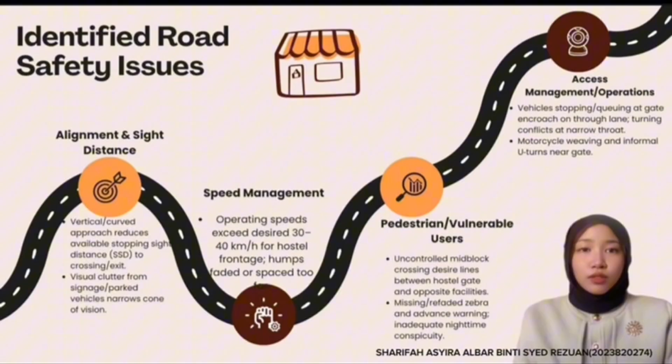Lastly, access management and operation are another concern. Vehicles stopping or queuing at the hostel gate often block the through lane, creating turning conflicts and traffic delays. We also observed motorcycles weaving through traffic and making informal U-turns near the entrance, which increases the potential for accidents.

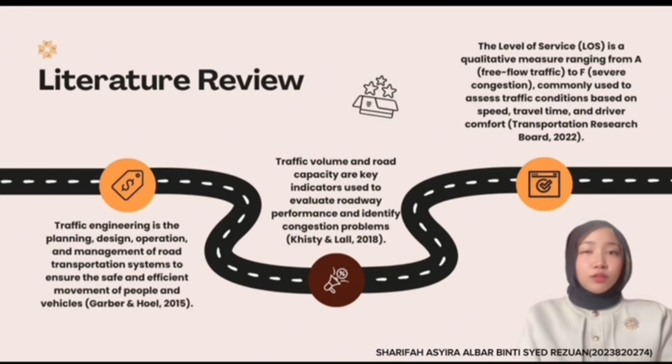For this slide, I will present the literature review for our traffic engineering project. Traffic engineering is the branch of civil engineering that focuses on the planning, design, operations, and management of road transportation systems. Its main objective is to ensure the safe and efficient movement of vehicles, pedestrians, and goods.

Another important concept is the level of service, or LOS, which classifies traffic conditions from level A, representing free flow traffic, to level F, representing heavily congested traffic. This classification helps engineers assess road performance and determine whether improvements are needed.

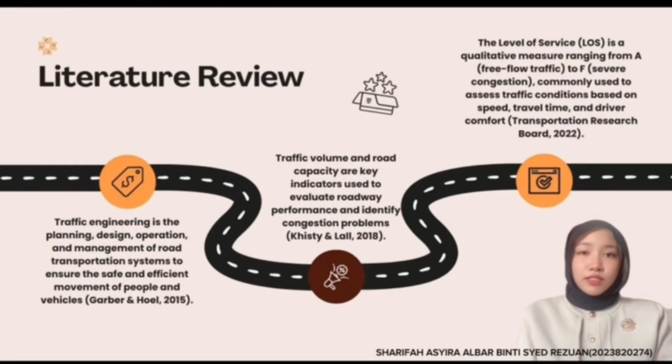Next, I will explain the technical standards that were used to assess the road conditions at our study locations. The evaluation was carried out based on the Arahan Teknik Jalan issued by the Public Works Department or JKR Malaysia, together with the Highway Capacity Manual and relevant road safety guidelines.

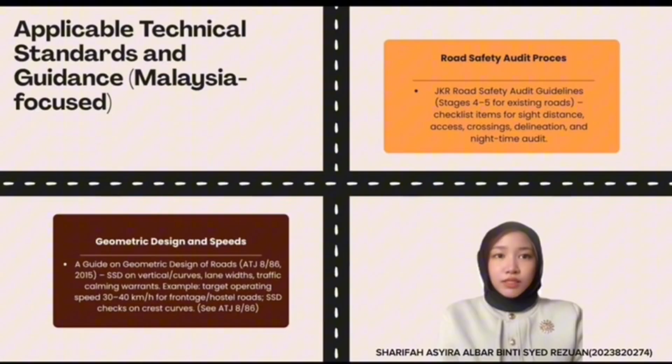For alignment and sight distance, the available stopping sight distance was compared with the minimum requirements supplied by JKR. The curved road alignment and visual obstructions reduce driver visibility, which may not satisfy the required stopping distance for safe operation.

Next, we selected a suitable study location. The chosen site was a straight and level road section located in front of Kolej Melati. This type of road minimizes the influence of slope and curve on vehicle speed, allowing us to obtain more reliable and representative traffic data.

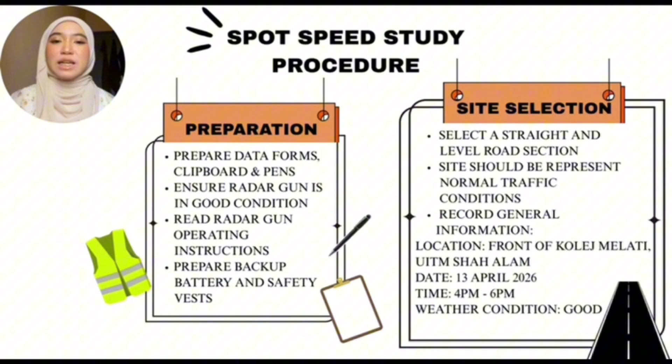Finally, we recorded the general information of the study, including the location, the date which was 13 April 2026, the observation time from 4 p.m. to 6 p.m., and the weather conditions which were good throughout the data collection period. This preparation step ensured that the spot speed study was conducted clearly, systematically, and accurately.

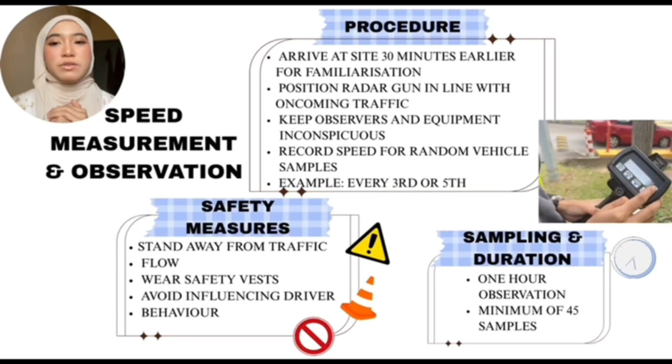Next, our team arrived at the study site about 30 minutes earlier to familiarize ourselves with the area and set up the radar gun. The radar gun was positioned facing the oncoming traffic to ensure the accuracy of the speed readings. We also remained as inconspicuous as possible so that drivers would not change their driving behavior when they noticed our presence.

For vehicle sampling, we used a random selection method by recording the speed of every third or fifth vehicle. This approach helps us to obtain representative traffic data. Although the standard procedure recommends collecting data for 1 hour or until at least 45 vehicle observations are obtained, our study successfully recorded 47 vehicle samples during the observation period.

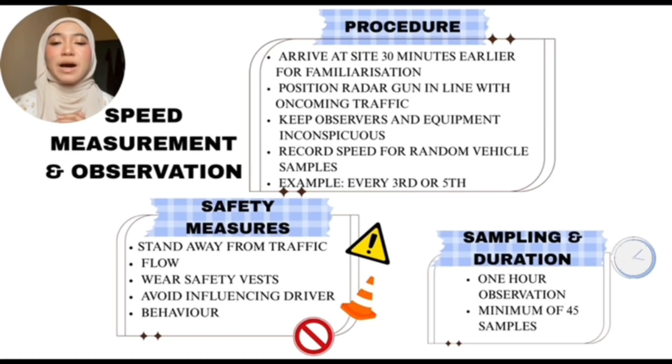Throughout the data collection process, safety was our top priority. We maintained a safe distance from moving traffic, wore safety vests to remain visible, and avoided any action that might distract drivers or interfere with normal traffic flow.

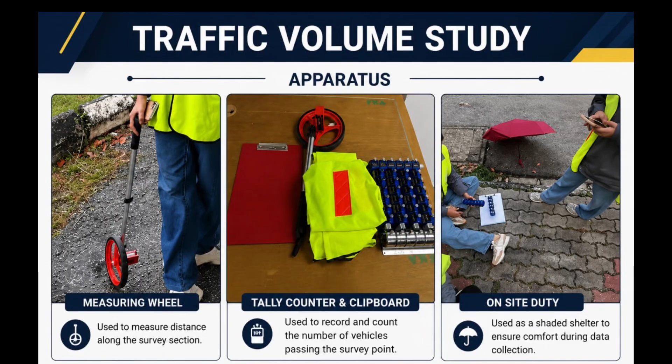For this traffic volume study, a road with a two-way T-junction was selected as the study area. Traffic observations were carried out continuously for 1 hour. The number of vehicles was recorded at 15 minutes interval, which were at 15, 30, 45 and 60 minutes.

After the observation period ended, all the collected data from the 6 traffic directions were combined and tabulated. The data were then analysed to determine the traffic volume, vehicle composition and traffic flow characteristic at the selected intersection.

For result and data analysis, let's look at the process data table. Overall, we record data for a total sample size of 25 vehicles, where n equals 25. In this table, the speeds are grouped into class intervals of 5 km per hour. From this data, we calculate the middle speed and multiply it by the frequency to determine the overall distribution.

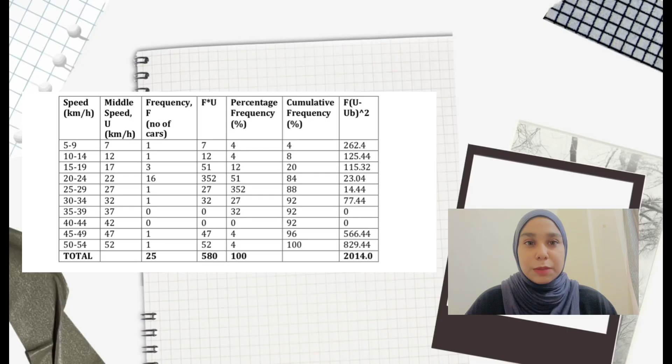The majority of the vehicles, specifically 16 cars, were traveling within the speed range of 20 to 24 km per hour. This indicates that the driving pattern in this area is highly uniform and concentrated around this range, while higher speeds above 35 km per hour show very low to zero frequency.

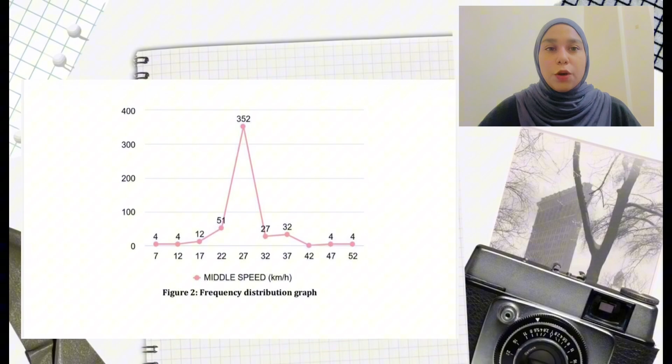Next, moving on to figure 2, which shows the frequency distribution graph. This graph plots the middle speed values along the x-axis. Once again, it reinforces the heavy concentration of speed with a sharp peak at the middle speed of 27 km per hour. The graph rises sharply from 17 km per hour and drops down immediately after 27 km per hour, showing that the speed distribution is not widely dispersed.

Finally, let's look at the cumulative frequency curve to extract 3 key percentiles. First, P15 is 18.43 km per hour, which is typically used as a guideline to set minimum speed limits. Second, P50 is 22.07 km per hour, which is the median speed where exactly half the vehicles travel slower and the other half travel faster.

Third, and most importantly, P85 is 24.12 km per hour. This 85th percentile speed is the standard engineering reference for setting the official posted speed limit, as it reflects the safe and comfortable speed chosen by the majority of the drivers.

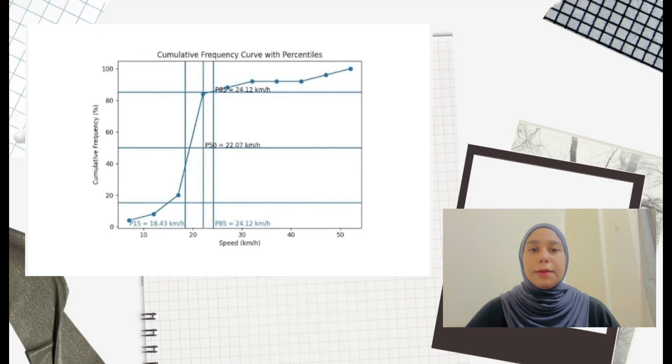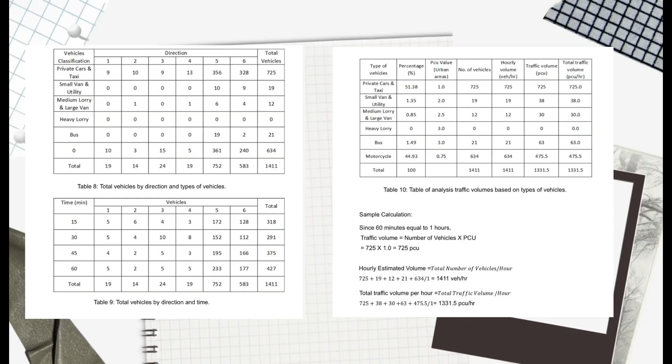Based on the traffic survey conducted for 1 hour, a total of 1,411 vehicles were recorded at the intersection. From the directional analysis, Direction 5 recorded the highest traffic volume with 752 vehicles, followed by Direction 6 with 583 vehicles. This indicates that most vehicles travel through these two directions during the observation period.

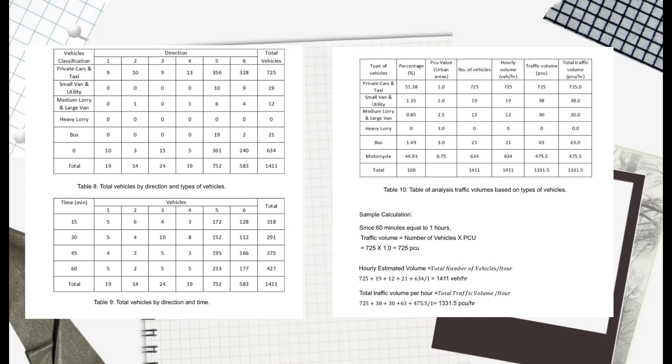In these slides, we will discuss the proposed safety improvement in the campus area. The main improvement is speed control, which is important to reduce the risk of accidents caused by fast-moving vehicles. In addition, road marking visibility should be improved to ensure drivers can clearly see lanes, crossings, and road direction.

We also recommend enhancing pedestrian facilities such as proper walkways, safety signs, and guardrails in high-risk areas. These improvements are essential to ensure the safety of both pedestrians and drivers within the campus environment.

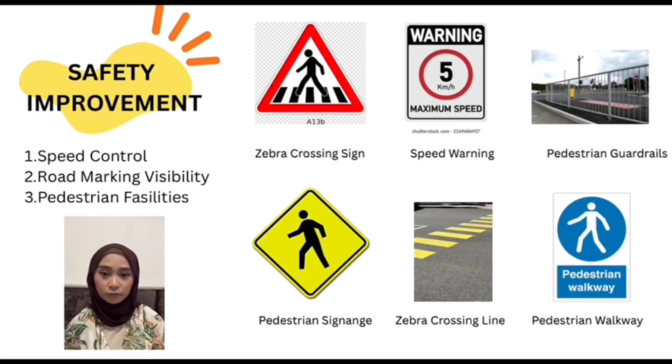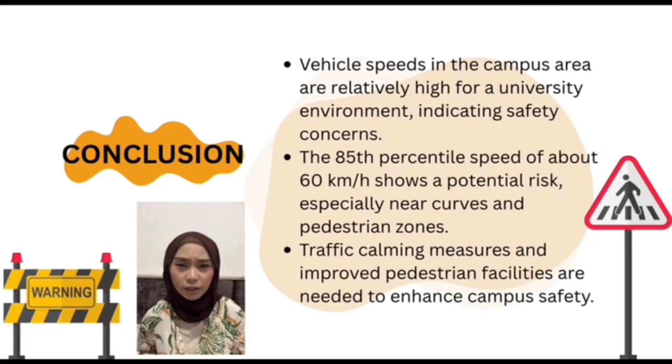Therefore, traffic calming measures, improved pedestrian infrastructure, and stricter speed management are necessary to enhance overall campus safety.